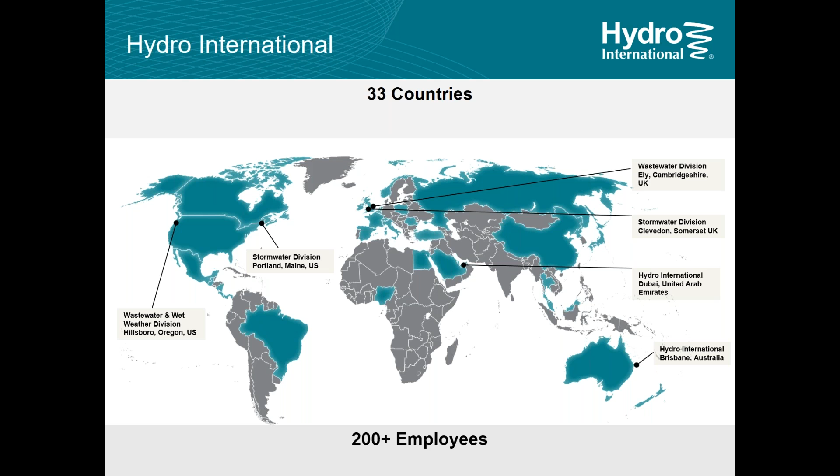We've been doing business for over 40 years. In fact, the genesis of stormwater treatment technology in terms of vortex valves and vortex technology started with Hydro's early founders in the 1960s, when they developed the very first vortex separators. It's basically variations on that product that have been developed over the last few decades that we see in the stormwater separators, stormwater control valves, and filtration systems that we're seeing today.

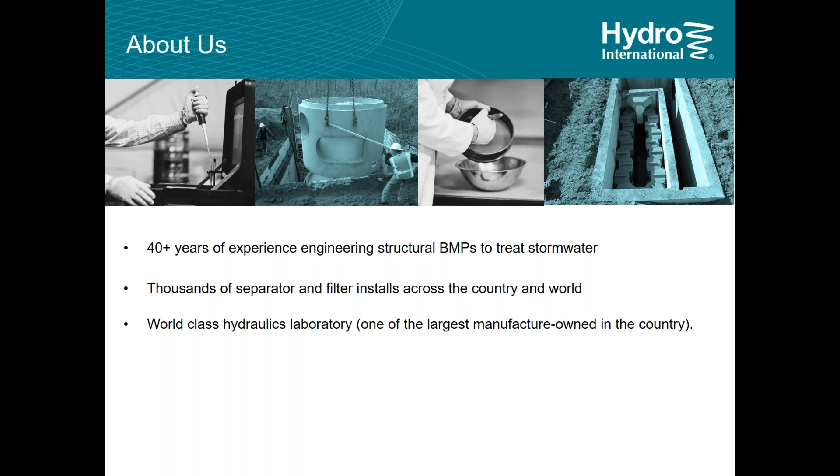Hydro is fortunate to have a really good lab and lab staff in Portland, Maine. We're one of the best hydraulic labs available to a manufacturer-owned company, so we can do a lot of rapid development and experimental testing in a high-quality lab, developing products, variations on products, and looking at how things react to these variations. So Hydro is well placed to be an innovation leader in this respect.

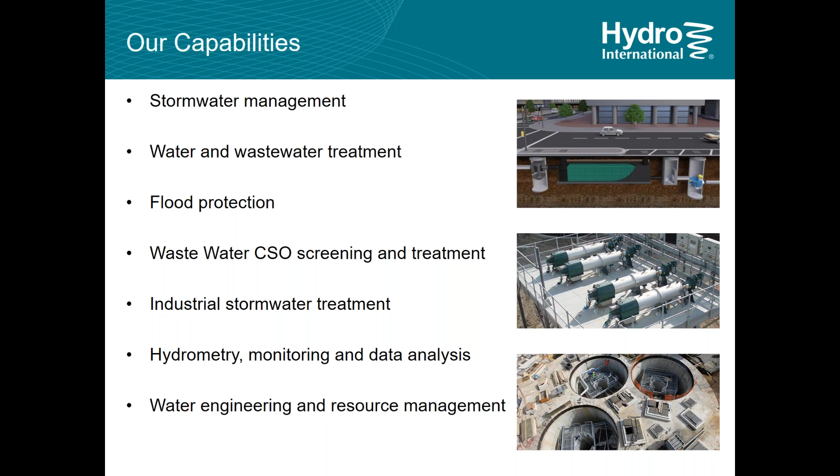And we don't just do stormwater. Hydro International works across a variety of industries: stormwater and wastewater, CSO, flood protection works, and industrial stormwater. We also have a hydrometry and monitoring and data analysis division, a water engineering division, and a maintenance division. That's not on the slide, but we've also got a stormwater maintenance division, which is becoming increasingly important within the stormwater industry.

We do work collaboratively with other interested parties like universities and other technology companies, and we also work with and get approval from quite a large number of different regulators and environmental agencies around the world.

So when we're talking stormwater treatment, this is a very broad category of things, and it really depends on what you're targeting as to the technology that's applicable to that pollutant. For instance, on the West Coast in California, they have regulations around screening and trash removal -- I think Florida does as well -- that require basically 100% removal of gross solids. In that situation, we're looking at screening technology for larger particle sizes, around 1 millimeter and larger, with big flows generally, and gross pollutant removal.

As we move along the spectrum of total suspended solids to coarser solids, we're talking fine sands up to coarse sands or very fine gravels. That's where hydrodynamic separation comes in.

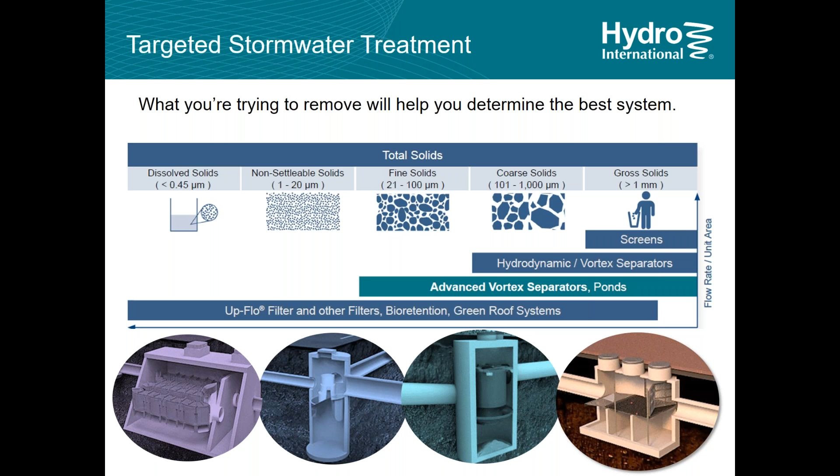Then as we move really down on the very fine stuff, sub 0.45 microns, we're talking about dissolved solids and microbial stuff that's really difficult to remove, and that's where technology is struggling a little bit at the moment.

So why filtration? This is an interesting aspect. As we get down into that lower end of the range, costs escalate. The cost of the product escalates, the cost of maintaining the product escalates, the cost of installing the product escalates. So there's a big jump in cost as you move down to these finer particles, but the return on water quality also goes up tremendously as well. So it's a bit of a cost-benefit equation.

So why filtration? Well, as we get down, removing particles less than 50 microns, the only practical solution is very large settling ponds, large settling basins, or filtration systems, maybe polymer enhanced systems using coagulants, an option as well. And also removal of dissolved pollutants like nutrients and metals - that's where we're really looking at filtration.

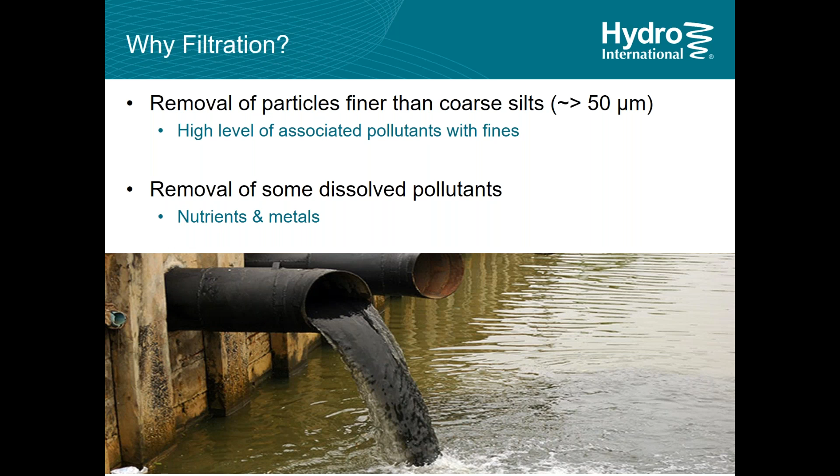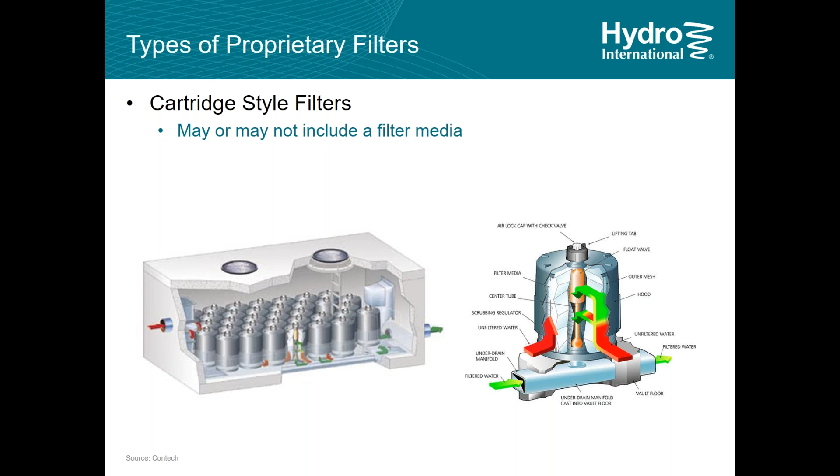Now, this industry has developed a lot in the last few years, and there are several developing themes within the filter market. One of them, in the proprietary filter markets I'm really referring to, are the cartridge style filters. Probably a lot of you have seen these, typically storm filter type things, bay filter, some of the trade names you might have heard of. These are basically cartridges that sit on the floor of a vault and act as either radial flow or similar, or flow up through the system. Some of them have media in them, some of them may be just membrane filters, but basically a cartridge system is a system that's fairly common now, easily scaled.

Another type of system is basically a gravity system, or a media type system. Some of these are pressurized. They're either used for isolated treatment of hotspots or industrial applications. There have been cases where these pressurized systems are used in conjunction with large storage systems, so that the stormwater is put into storage, run through a pressure system, and then released out into the environment.

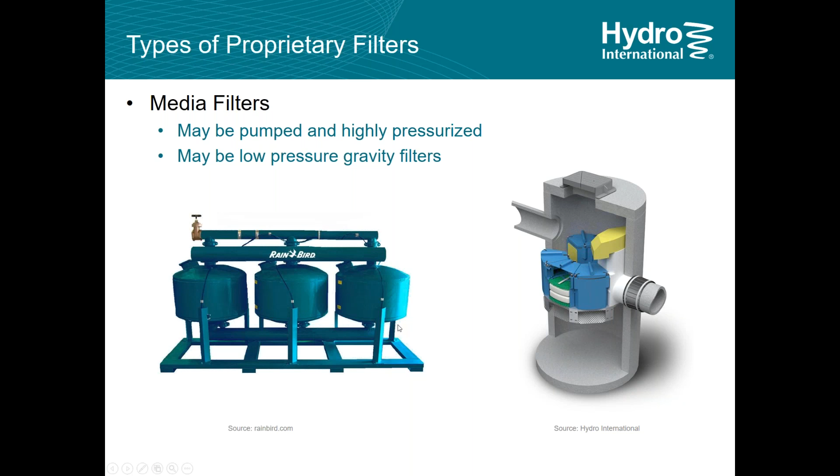And we have things like the Up-Flo filter here. This is the one that Hydro develops, which is basically a low pressure media filter type system. So these are the media filters. Then more recently, we've come across developments into what we call membrane filters. These are basically fabric type filters - they generally don't contain any media. They're a straining system, and they use a fine membrane as a filtering system.

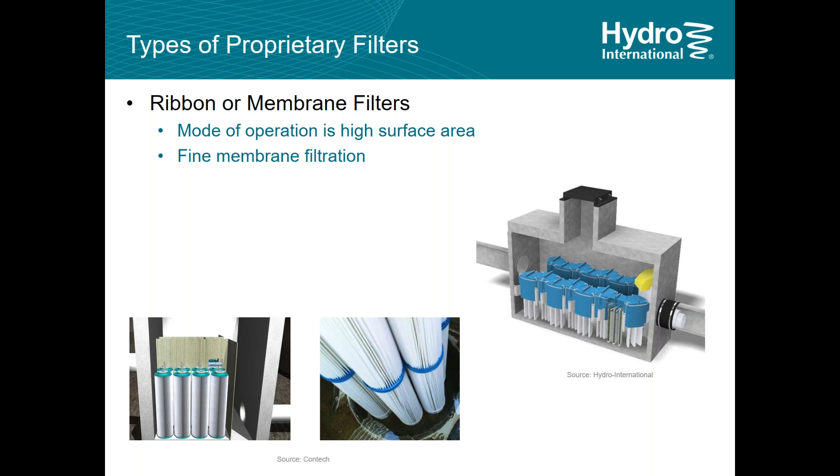So there's that type. And also the bioinfiltration filters now coming in - we've seen this for many years now, the tree in the box system. These are basically media filters where the water percolates through the system. The tree or the vegetation may help maintain percolation rates, but most of the treatment is done within the soil mass and the specialized soil that is used. And it's either infiltrated into the ground below that, or through an under drain out to discharge.

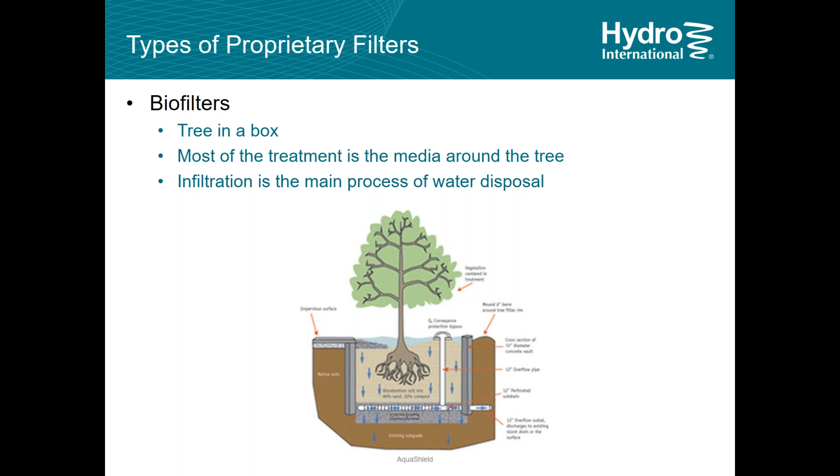So what's driving all this? We have these different systems being developed. Companies are trying to improve on old themes, developing new themes. Well, the innovation drive is really, at the very top, basically regulation. Basically, regulation forces action - we don't generally react until something's got so bad that we have to. It's an unfortunate situation that clean water doesn't really get noticed, dirty water does. And if we'd noticed the clean water first and kept it that way, we wouldn't be in this situation, but we have what we have.

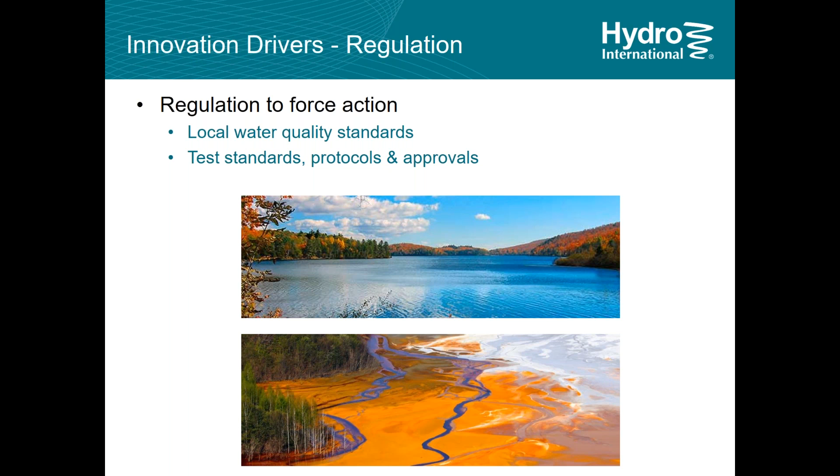Also, test standards, protocols, and approvals have a tremendous influence on technology. Typically with the local water quality standards, we're talking about the Clean Water Act and additions to that, total maximum daily loads, or the 303D list, which many of you should be familiar with, which are linked to specific pollutants of concern in impaired waterways. Every local authority or every state should have a 303D list. We have the general water quality standards through the MS4 permits - these generally sit around the 80% TSS reduction for sediment.

We see typically numbers like 40 to 60% total phosphorus reduction being used, maybe some attempt at nitrogen removal, but they're generally a percent reduction type of regulation rather than a specific effluent limit.

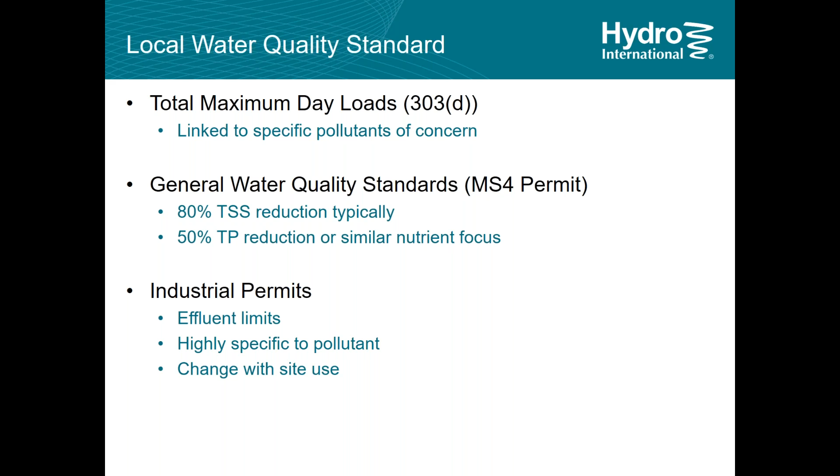Then we have the industrial permit. For us, this is an area we've been concentrating on for the last few years. The industrial stormwater permit is very strict in what it says, and it's an effluent limit, so you can't discharge more than a certain concentration of the pollutant you're putting out. It's very specific to a site, specific to a pollutant, and it can change with land use, especially at places like port authorities, where what's going through the port can change daily or weekly, which changes the pollutant concerns. So you need an adaptable system that can address all these changes.

So we've got the regulation up there, over sort of an umbrella over everything. And one of the big things in our industry, especially with proprietary systems, is that there's no national clearinghouse that says I can send my equipment to it, get it tested, verified, and approved, and everyone will accept that it does what I say it does.

So what we do have are two fairly large and commonly used clearinghouses. One's known as Washington DOE, or Department of Ecology. It uses a thing called the TAPE protocol, the Technology Assessment Protocol for Ecology. It's a test protocol and process you go through, and it's basically used primarily on the West Coast. It's a field test verification process, and it has multiple levels of approval.

So the interesting thing about approvals currently, some of you may have realized this if you're familiar with regulations and the approval process: many regulations are written around 80% TSS or something similar. In recent years, as these test protocols have been updated and standardized, Washington DOE, when it comes to separators—not the filters I'm talking about at the moment—they're testing for 50% TSS removal. So there's a disconnect between the TSS removal requirements: the 80% we see in many stormwater manuals versus the 50% test level we're actually seeing through Washington DOE and New Jersey DEP.

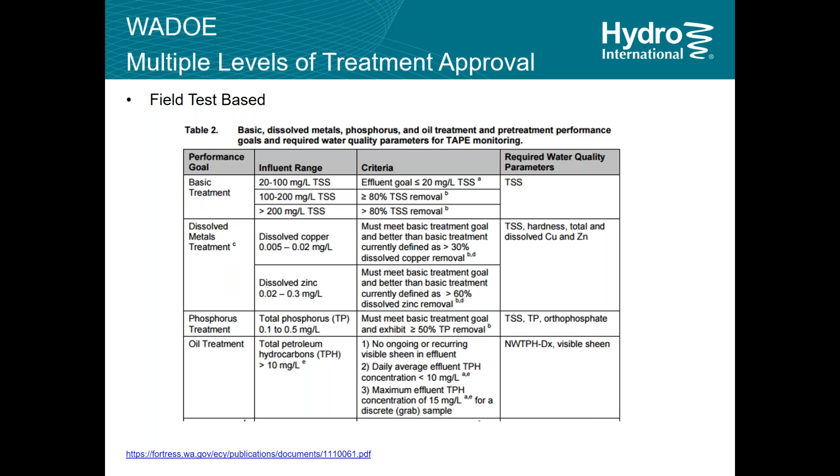So this is a tremendously involved and complicated thing to do. It can take 2, 3, or 4 years, and involve several hundred thousand dollars. So for a vendor coming along and looking at this, you really only want to do it once—you don't want to be doing this 2 or 3 times. So you look at your filter and ask: can I develop a filter that can do both the basic treatment, including the dissolved metals and phosphorus, and maybe the oil, in one hit? So we're looking for a media that can do a lot of different things. This drives the shape and size and what I do to develop a filter to pass this protocol and get approval to sell it.

Now the other major clearinghouse commonly used is the New Jersey Department of Environmental Protection, on the East Coast. So we've got one on the West Coast, one on the East Coast. This is a lab test protocol based around removing 80% TSS. From a vendor's point of view, this is far more specific—it's quicker to do because I'm doing it in the lab, I can control the variables, and I can do it in one hit. But I'm also looking at one pollutant, and that's total suspended solids.

So I'm not having to try and compromise. Now I've got a different situation with this test protocol, and this is driving a different aim in my product development. Once I go through this, I get assigned a treatment flow rate for my test unit, and I can scale that up.

Now usually I just test with either a single cartridge or a single module that represents a miniature version, or a full-scale miniature that I can then just scale up.

As part of this, filters have a treatment flow rate. There's an inflow rate that you treat and get a result for, but you've also got to consider the overall catchment being serviced and the load coming off that, because a load can overwhelm a filter in one hit, as opposed to a small constant flow you can treat easily, then suddenly you get a big wash and overload the filter.

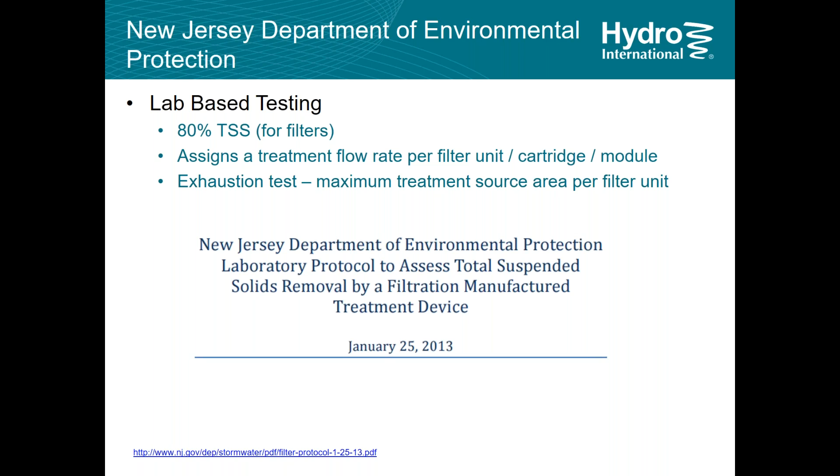So you have an exhaustion test as part of this as well, so you might get approved to treat half a CFS or 0.25 CFS per module, but at the same time you get approved that that module can only treat maybe 0.1 or 0.2 acres, so either the area dictates or the flow rate dictates the sizing of the filter.

So the influence of those two protocols is quite interesting, because if I go to the Washington DOE and look at what's approved there, the majority of the filters approved and being developed to pass the Washington DOE test are media filters. If I go and look at the list of approved filters for New Jersey, every one of them is a membrane filter. No media filters used at all.

Now there's a reason for that, and there's also a commercial influence, because vendors are looking for an advantage when they do the pre-testing, to get some idea of where they're going to land. You don't want to be on the bottom of the list because you're going to spend all this money to do the test and perhaps be the worst performing. You're going to try and land somewhere in the middle or near the top to improve on previously approved devices. So there's a bit of competition between vendors.

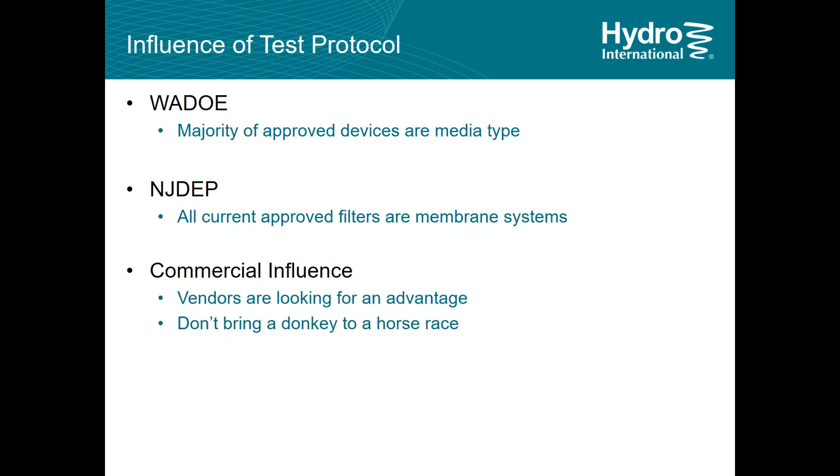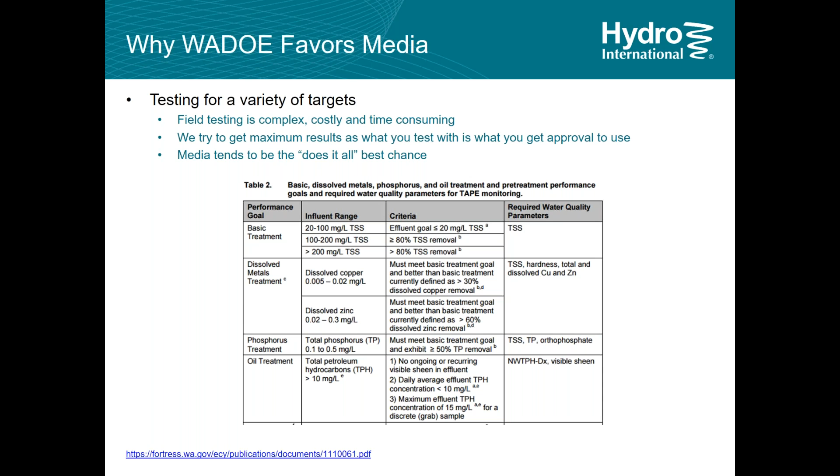Well, that's just straight straining or filtering. You're going to need ion exchange or something like that, absorption or adsorption for copper, dissolved zinc, and phosphorus. So you need a bit of a Swiss Army knife of media to be able to do all this. So by default you tend to use a media filter for this.

When I look at New Jersey DEP and the particle size gradation required for testing, you see the median particle size, the 50% finer, is about 63 microns, something like 70 microns. But when I look at the weighting, a fair bit of the material, 30%, is sitting roughly around 20 microns, and 20% is below 10 microns.

Now, when I get down to these 10 micron sizes and below, that's the sort of stuff that'll pass through a media filter. It's so fine it'll find its way through. To get 80% removal of this, I've got to basically guarantee that nothing, or very little, over 10 microns can pass through my filter.

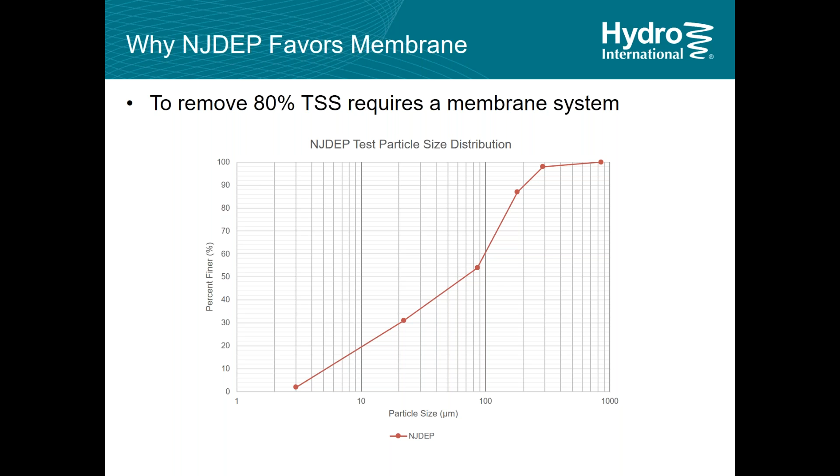So the only way to do that is to put a system there that actually has a 10 micron screen in it. And that's why these membrane filters are ending up on the East Coast, and media filters are ending up on the West Coast. So the test protocols are really driving the technology.

So is there really any difference between media and membrane filters? Well, there is a little bit. Membrane filters are physical straining. They work really well for fine TSS.

You'll see that because they are a membrane filter, you really want a high surface area. So the technology is around trying to get the maximum surface area you can, because surface area translates directly into flow rate and load rates, and it also allows you to maybe get smaller footprints for the same flow rate. So vendors in the industry at the moment are trying to work out how they can get the maximum surface area and smallest footprint to be competitive in a bidding situation, so they're not using a bigger footprint than competitors. So the NJDEP stuff is an ongoing process of product development.

Media filters, they do TSS pretty well, but they remove pollutants via adsorption and absorption. They have the potential to remove dissolved pollutants that would pass through a simple membrane, and the potential to customize the media for changing conditions is one of the great benefits of media filters. So they have their pros and cons, and it really depends on the application.

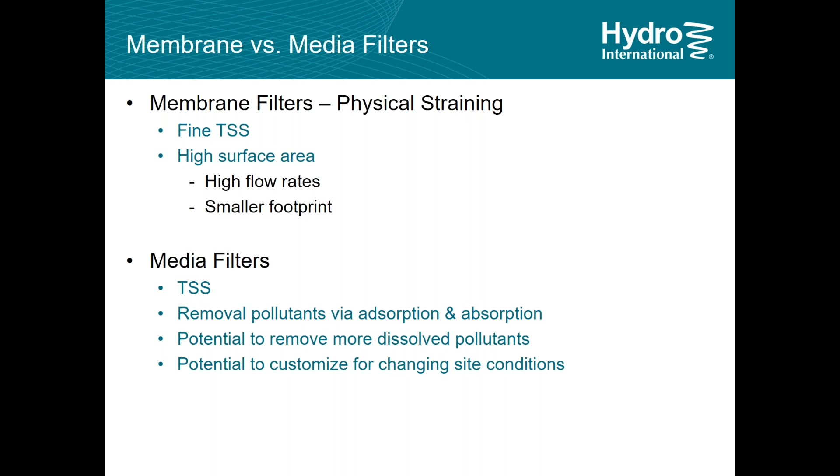The industrial permit is a further driver of technology at this point. We started working within the industrial permit regulations several years ago, and it became apparent that people really didn't know what they were treating for, because they didn't know what was coming off their site.

They know they had this permit and the regulations, so one of the first things we did was develop a piloting system where we could send a full-scale unit to a site on a truck basis, and they could pump the water through it and do some pre-testing and try and work out whether the system would work well or not, or whether it needed modification before you put it in the ground, and went to the tremendous expense, because industrial treatment is very expensive to do.

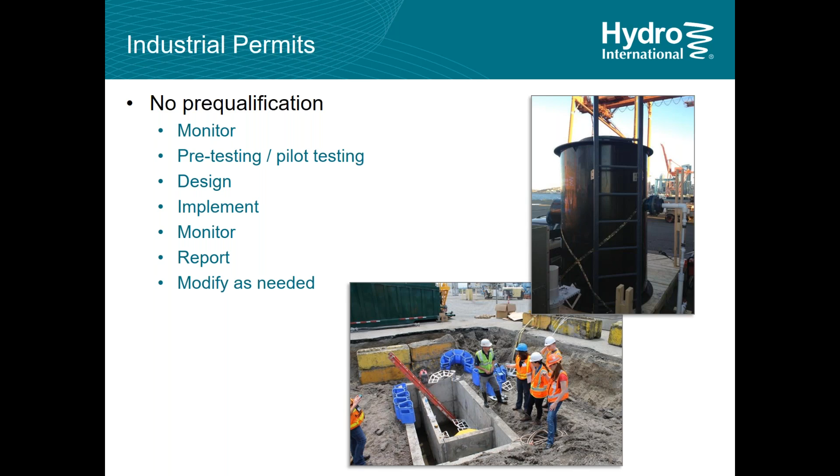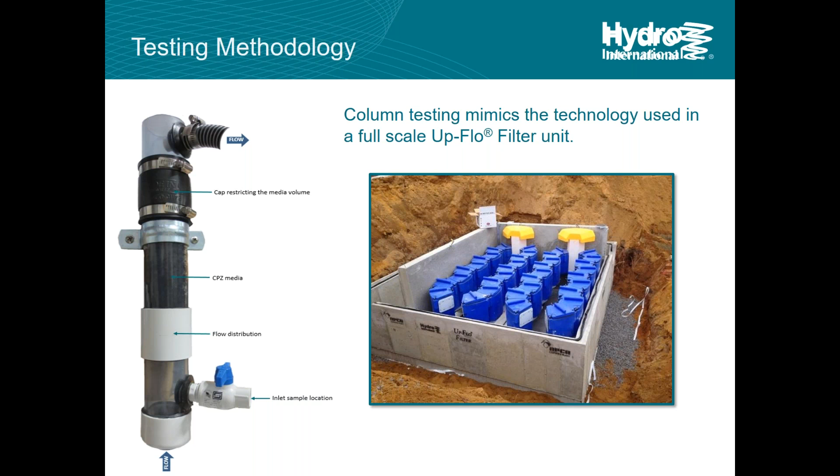This led on to sampling kits and sending out sampling systems, and actually then lab basing our pre-testing. So now we have a modeling system where we can characterize the media, and we can test different media in a rapid development process before we go to the full-scale systems.

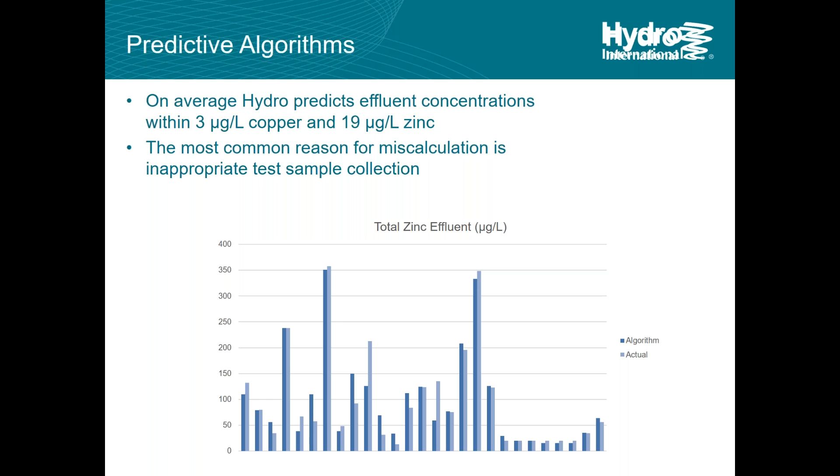Now this has actually led to a further development within our system where we can use predictive algorithms for the industrial permit, based on influent concentrations, to predict what we're getting on the effluent side. We're finding very accurate predictive algorithms now, so we can take water samples, measure the concentrations in that, and predict what the effluent samples should be before we actually move anything to site. So this technology and our understanding of stormwater treatment is just going up in leaps and bounds at the moment.

So where's the future going to take us? Big question. It's going to depend a lot on where regulation takes us. Hopefully we don't go backwards in regulation. That's anyone's guess at the moment, right? We would hope that regulation is moving forward, and that we do look towards water as a very valuable resource.

Everyone out there, the different products, different vendors, is kind of looking for a magic media, one that's going to get high removal of nutrients, one that's going to get high removal of metals. It's going to do it at very high flow rates, at very low cost, and you never have to maintain it. That would be the utopia of stormwater filtration. I don't think we're ever going to find it.

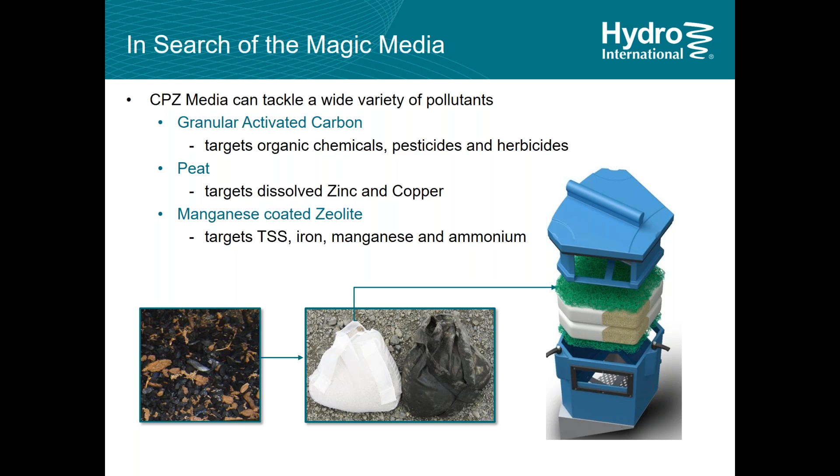And then at some point we're going to try and remove nitrogen as well. That's another problem. So there is a lot of research going on, and we are trying to develop these high flow rate, high treatment rate, dissolved products that remove dissolved pollutants. That's where we're trying to get to. And also we're trying to develop things for industrial materials, particularly dissolved nutrients, very fine particles.

Now the other thing we need to be cognizant of is that there are different climates and climate influences and what happens in those climates. You do all this work and you put your filter in the ground and you do some testing and you find that it's not working. You work out why. And one case we had, quite simply, it was too close to the coast.

You get a big storm coming off the coast, you get a lot of chloride, salt air, salt water landing on a surface. That washes off in the next storm, and that chloride can actually act as a scrubbing process through your filters and actually cleans them. Not exactly what you want to happen.

So chemical stability of your filter media against chlorides and de-icing chemicals, and whatever else might happen on site that you never thought of when you did your lab testing and thought, hey, look, it really works. It removes a lot of phosphorus or it removes a lot of zinc. And then you throw a little bit of something else in there and suddenly all that stuff comes out the back end. You go, oh, that didn't work so smartly after all.

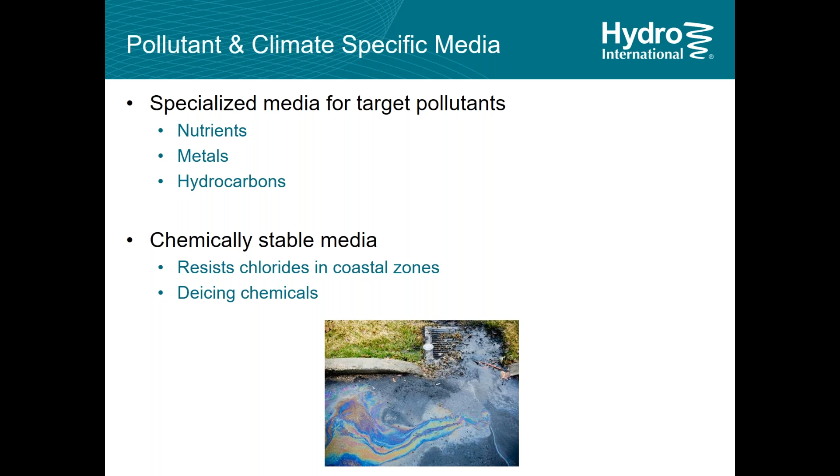So we have to consider the pollutant and the climate and the environment that they're going into. Also, what we find is that products are changing rapidly now too.

3D printing is having an influence on how quickly you can prototype stuff. Technology is advancing. When we first started with the filtration system, we started with this upflow filter and a manhole configuration. We thought it'd be a great idea to make this so it could fit inside a standard 4-foot manhole, that it would go down through the lid and be retrofitted. Turns out that a lot of the manholes people asked about didn't suit retrofitting, that you actually have to replace the manhole anyway.

Then we decided, if we zigzag these things, we could put them in vaults and make them bigger. That was a great innovation, and it worked really well. But then we thought, well, if we're going to do that, why don't we just redesign the whole module to make it square, to fit in a square vault? So that's our next innovation, redesigning the whole module.

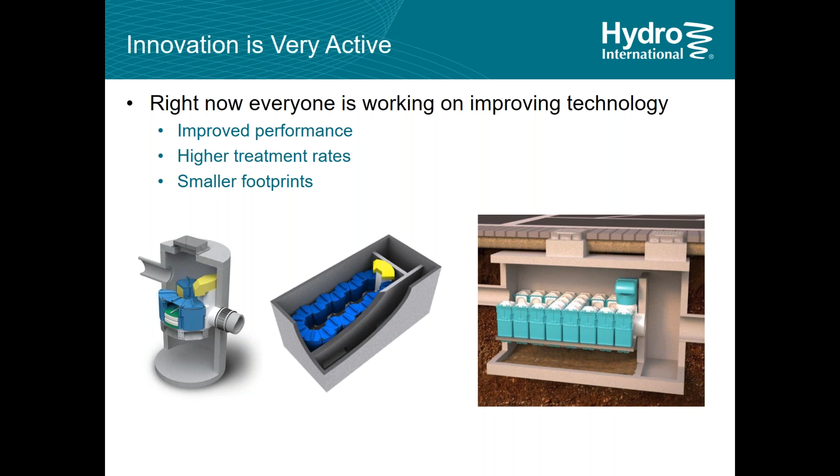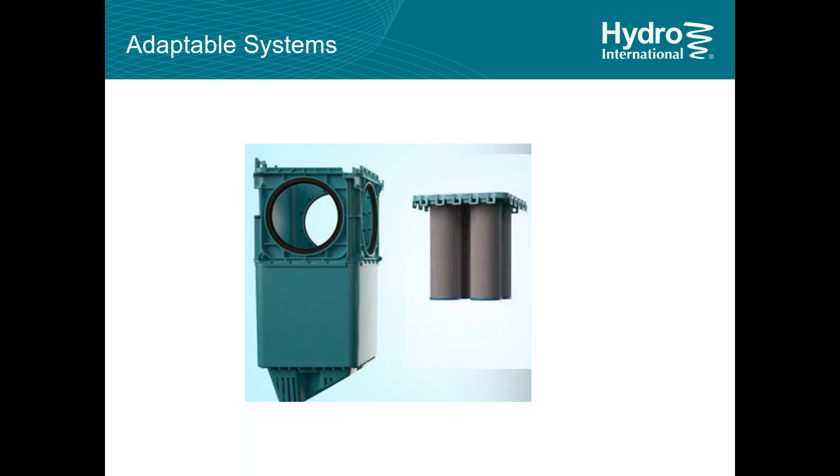And then you start thinking, where does that take us in terms of innovation? If we've got a new module, can we make it a universal module, say add media one day, and should the site change or the need change, flip it and put membrane filters in there the next day, or a combination of the two. These adaptabilities of technology are coming into it, and that's where we're heading within Hydro: looking at filters that can be adapted to a variety of conditions on the same site without actually digging anything up. You can maybe add more, allow for future expansion by putting empty vaults in and just using them for volume control, then later install a modular system.

Now we're getting towards the end, so only a few more minutes.

BMP maintenance is perhaps the ignored BMP. This is one of the biggest problems we have in the industry, and I think this is part of the future of stormwater treatment that's going to have the biggest influence on water quality: the maintenance of the BMPs. Even these big ponds we see around, big stormwater ponds, they're all going to get to a point where they're not working effectively, they'll be full, they'll need dredging and cleaning, at tremendous cost. Hydro itself has set up, as I mentioned before, a maintenance division, so we can offer these services as part of the sale, because we know maintenance is going to be an increasingly important part of stormwater pollution removal.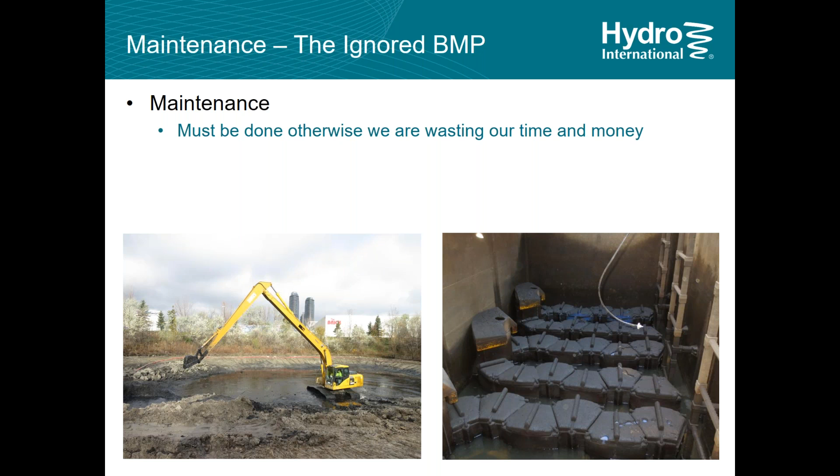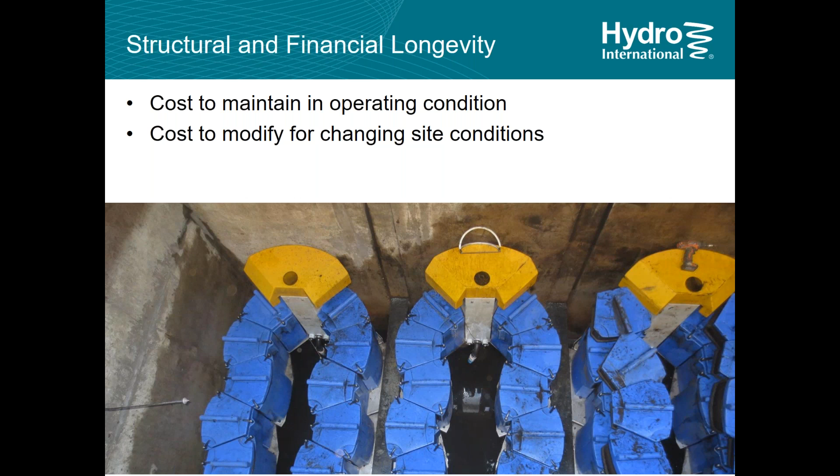And structural and financial longevity. Everything we design has to last for a long time. One of the important drivers of innovation now is also, what does this cost the owner on a long-term basis? It's not about the short-term cost to put it in; it's about what it costs every year to keep that thing running. That's an important part of the innovation drivers we're going through. So we're looking at how we can make these costs more acceptable, and provide a solution that engineers can offer their clients that isn't going to break the bank to keep maintained, because at the end of the day, it's the continued maintenance of the system in good working order that's going to be good for water quality, not the system as it was installed on day one. It's the system as it operates 3 years, 4 years down the line.

So basically, in summary, regulation and pollutants are driving the use of filters. Test protocols, as we went over, really are dictating the type of filter being used, because we're designing filters, A, to do a job, but B, we're also designing them to pass the test protocols, because if you can't pass the test protocols, you don't have a business. So membrane filters have basically been designed for high TSS removals, high flow rates on the East Coast, and media filters are basically working out on the West Coast through the Washington DOE test protocol. These then become available to everyone to use.

Significant research is going into filter media at the moment, and also the adaptability of filters. We're seeing this amongst a number of vendors trying to make one filter able to do several things, or to be able to switch it out a little bit. And the final thing is maintenance. Maintenance is going to be a really big part of BMP performance in the future.